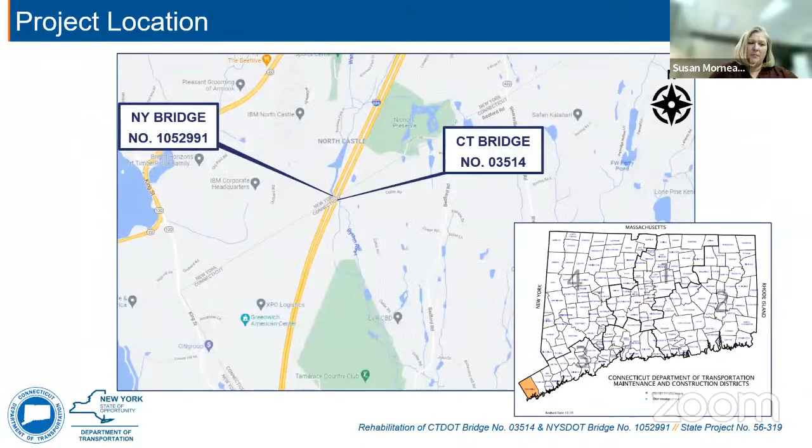Thank you, Susan. As Susan said, my name is Quinn Duffy. I'm a project engineer with BL Companies, and I am assisting the Connecticut Department of Transportation administer this project.

You can see the project location here with leaders pointing to the Connecticut Bridge, which is 03514, and the New York Bridge, which is 1052991. We typically refer to these types of structures as sister bridges because they carry the same route over the same river. You can see that this project is located on the northern end of the Connecticut Panhandle.

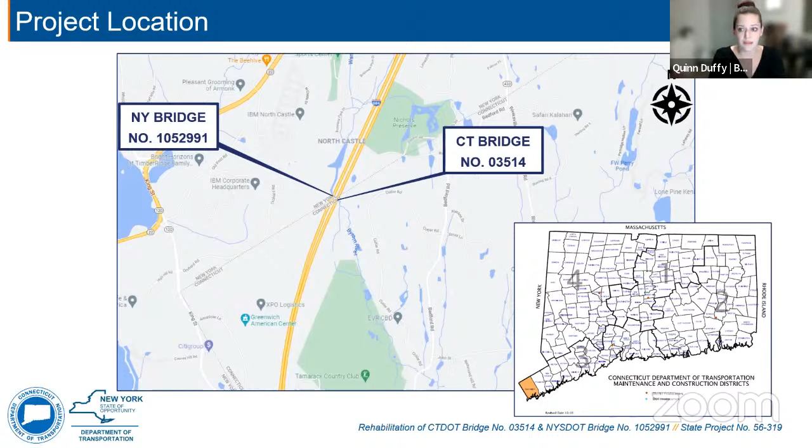The project is located in District 3 in Connecticut and District 8 in New York.

Here we have a little bit more of a zoomed in aerial location of the project. You can see the white dashed state line that passes right between the sister bridges, which are outlined in red. The Byram River is shown in blue, Cutler Road to the east in Greenwich, Connecticut, and the edge of the IBM campus to the west in North Castle, New York.

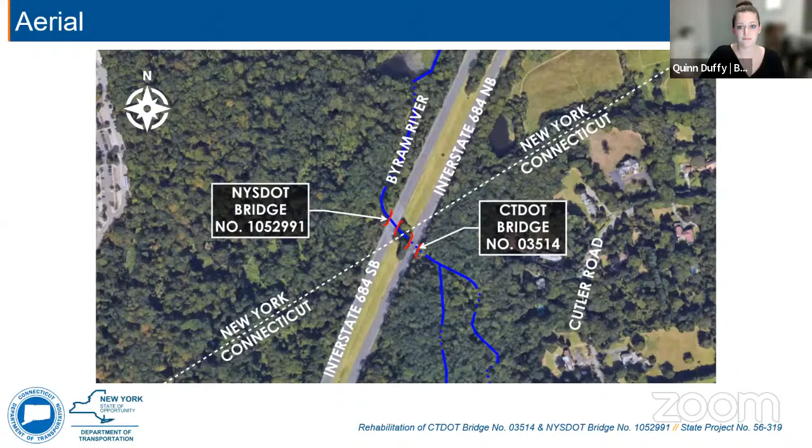We will be referring to a couple of elements in a bridge structure that may not be familiar to you throughout the presentation, so I'd like to take a moment to introduce them. The substructure, shown here in red, is the component that supports all other elements in a bridge. The substructure can include abutments and piers, and it does include parts of the structure that are underground.

The substructure supports the superstructure, which is shown here in blue. Superstructures can consist of beams or girders, or in the case of the structures we will be discussing tonight, box beams. These beams support a deck, which is shown in light green, which is the component you drive on.

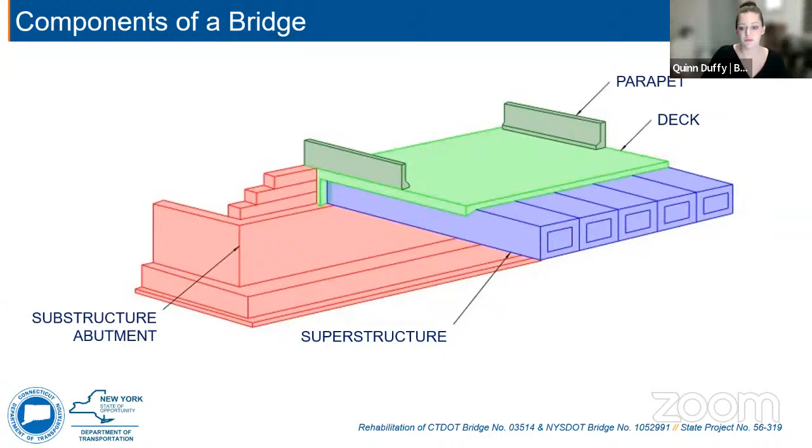Decks typically have a wearing surface or pavement on them as a cover. The last component I want to point out are the parapets, which are shown in a darker green color. These can be anything from metal railings to solid concrete and protect drivers on the structure.

These bridges are comprised of single span structures consisting of pre-stressed concrete box beams that are supported by reinforced concrete abutments. The combined average daily traffic on both the Connecticut and New York bridges is just under 71,000 vehicles per day, and that is based on the 2019 Connecticut Department of Transportation traffic log.

All right, here you can see the existing typical section of the Connecticut Bridge. It's as if you had sliced it like a piece of cake. You can see the precast, pre-stressed box beam superstructure that supports 3 12-foot travel lanes, a 6-foot left shoulder, and a 10-foot right shoulder with an open steel bridge railing.

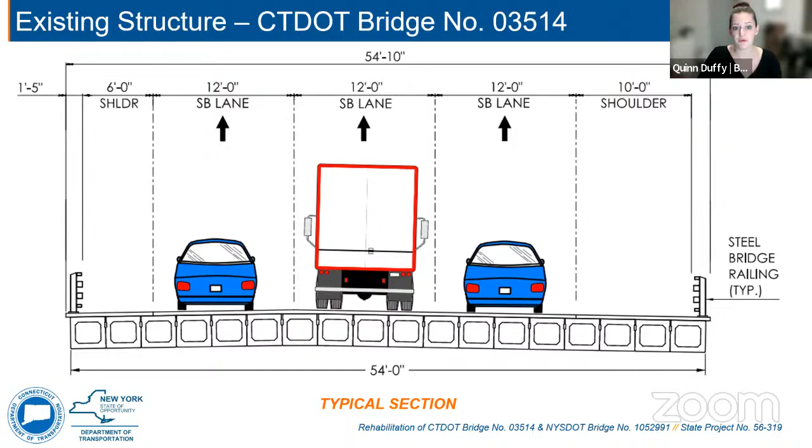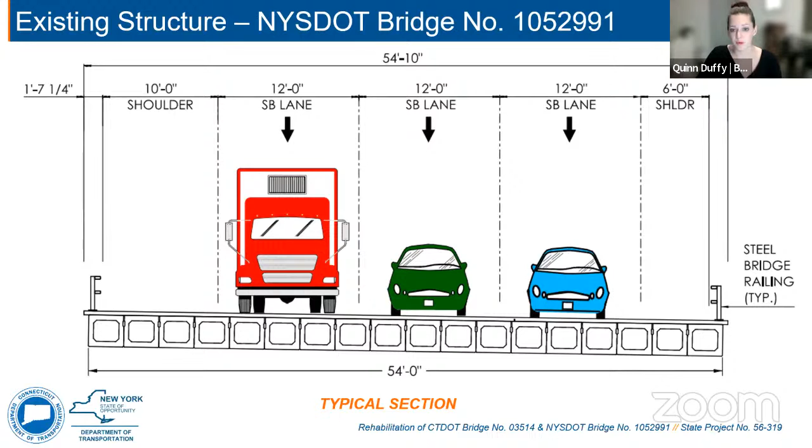Very similar to the Connecticut Bridge, the New York Bridge also supports 3 12-foot travel lanes, a 10-foot left shoulder, and a 6-foot right shoulder. The main difference between these two structures is the cross slope. You can see on the New York Bridge, there is no high point or crown like there was on the Connecticut Bridge.

Here we have a couple of bridge approach photos. On the left, you can see the Connecticut Bridge, which carries I-684 southbound. This is a picture that's taken looking north. Similar, on the right, we have the New York Bridge, which carries I-684 southbound, and that is looking north as well.

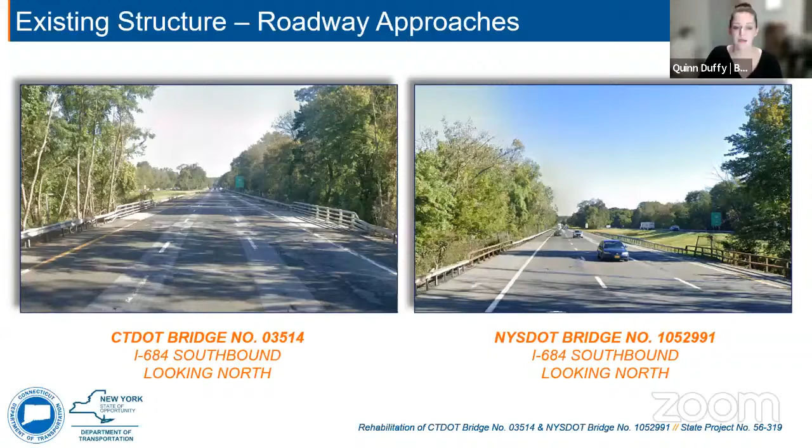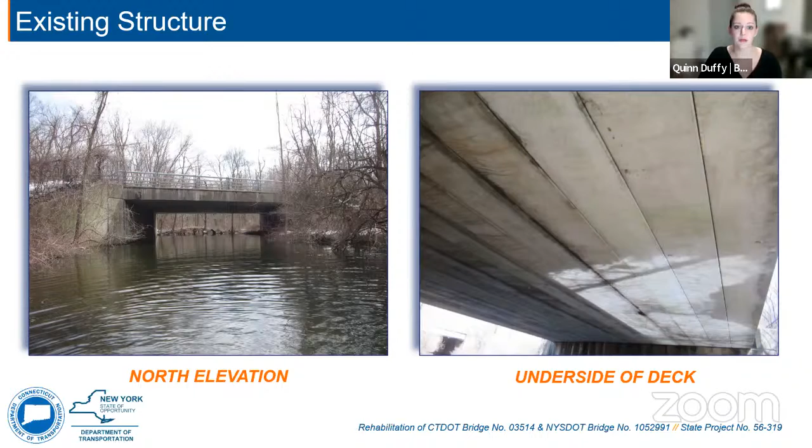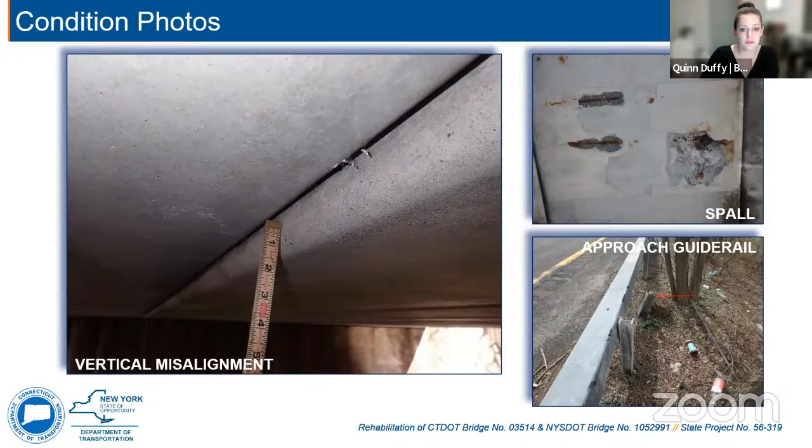So for the purpose and need of the structure, I'm going to focus on the Connecticut Bridge, because that was really the driving force behind this project. The purpose of the project is to address the safety concerns and structural deteriorations of the existing structure. The overall condition of the Connecticut Bridge is poor. As seen in the photos on the previous slides, the pre-stressed box beams show minor spalling with exposed rebar.

The post-tensioning strands have deteriorated or failed, which causes the box beams to act independently of each other. That makes the beams look like piano keys being played at different times as cars and trucks travel over the structure. That piano keying has caused severe deterioration to the bridge deck and wearing surface.

The metal bridge rail has deterioration on both structures. However, as you can see, the bridge rail has been replaced on the Connecticut Bridge, leaving it in moderately better condition than that of the New York Bridge.

There are a couple photos on this slide as well that show some of the deteriorations. The photo on the left is the existing bridge rail on the Connecticut structure, which has been replaced since the bridges were constructed originally. The photo on the right gives you an idea of what the deck condition looks like, specifically at a joint. You can see areas of pavement patching are missing, and missing joint material as well. This creates an uncomfortable experience for the traveling public or the driver.

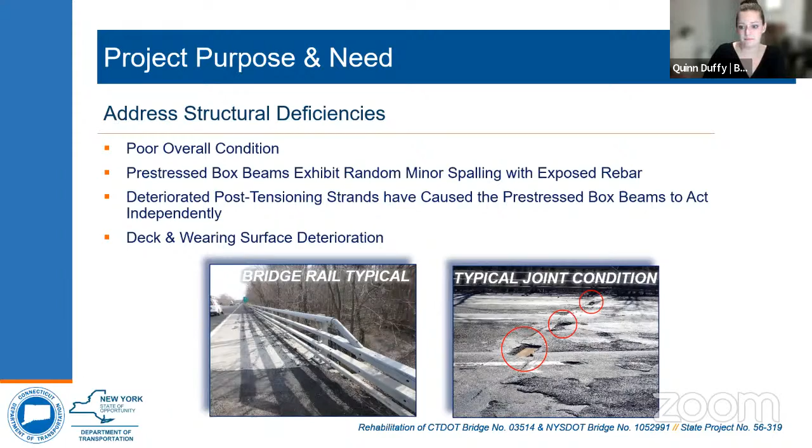All right, thank you, Quinn. So we went through a pretty extensive alternatives analysis to determine the best approach to rehabilitate these structures.

We're going to be using modern construction details and modern components so that we can extend the service life of those abutments and really get the biggest bang for our buck when we rehabilitate this structure.

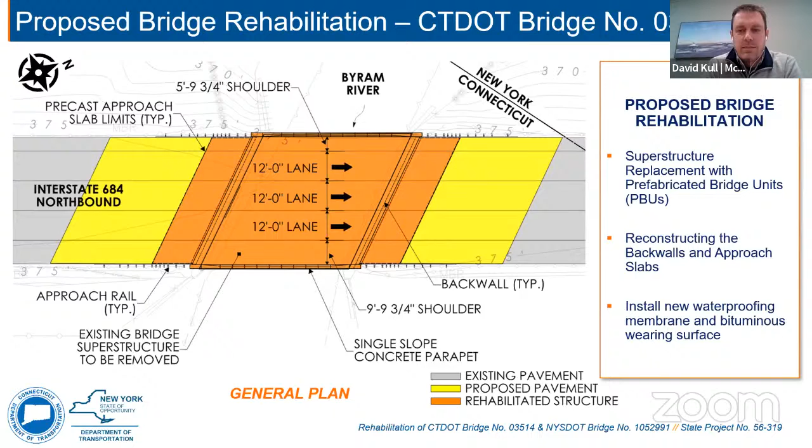So this is a general view of the Connecticut Bridge and the work that's going to be performed. If we move on to the next slide, you'll see that it's pretty similar also for the New York Bridge. We're going to be doing the same thing.

Superstructure replacement, approach slab, and approach roadway work. Taking another slice of that pie, this is what our proposed structure is going to look like.

We're going to be keeping the same lane configuration, 3 lanes in each direction. We will be putting a modern bridge barrier that meets current design criteria on the bridge. So one of the things we have to do, because we're keeping the existing abutments, is shorten our shoulders by a couple inches on either side. We're going to be putting a modern concrete barrier on top of the bridge, and because of that, we're going to have to go from a 6-foot shoulder down to basically 5'9" 3/4 for the Connecticut Bridge.

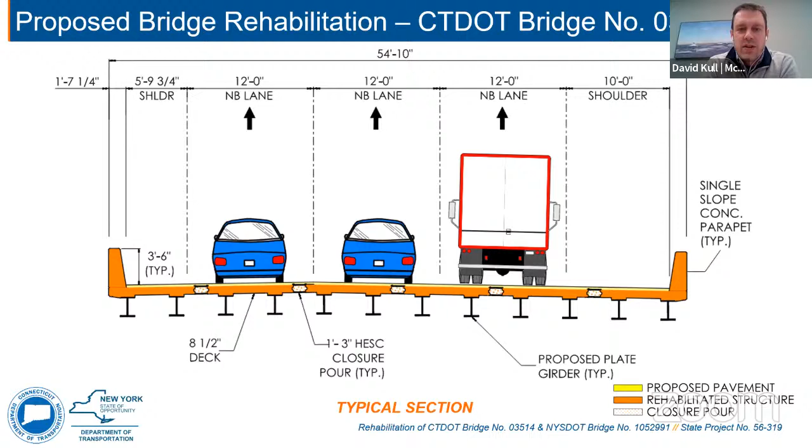And we move over to the New York Bridge, you'll see that it's pretty similar. I'll talk about those closure pours in a second on the next slide. Same thing here, you can see the shoulders have just been reduced a little bit.

So one of the things we were taking a look at is how are we going to build this bridge, and how can we minimize impacts to the greatest extent possible? The method we chose to move forward with is called accelerated bridge construction, or ABC, which minimizes the closure duration to the greatest extent possible.

The way we're going to go about doing that is we're actually going to build most of the superstructure in advance, prior to when we have to get out there and shut down the bridge and divert traffic, which Gina will be talking about in a second. One of the interesting and fun aspects of this is when we actually get out there to close the bridge to traffic, most of the bridge will have already been built. It's just a matter of us or the contractor taking it and dropping it into place and then connecting it like a bunch of Lego sets.

So what we're going to be using for this superstructure is what are called prefabricated bridge units, or PBUs. This is a technique for accelerated bridge construction, very common, done successfully all throughout the country, where we basically take 2 beams and pour the modern concrete deck on top of them, and ship those pieces out and put them into place.

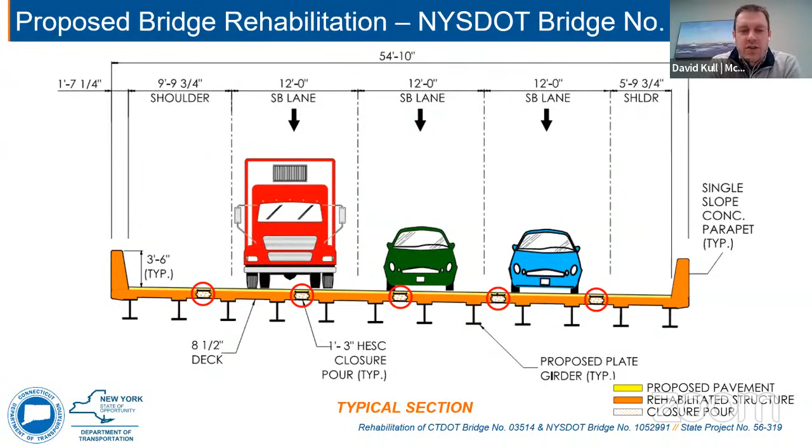If we move to the next slide, we can show some actual real life PBUs of what's going to happen. Here's a picture of a PBU on a successfully completed project. It's a little hard to see, but there's 2 beams with the concrete deck, and some of the reinforcing sticking out there are those hoops, used to connect to the next PBU, which we show in the next slide.

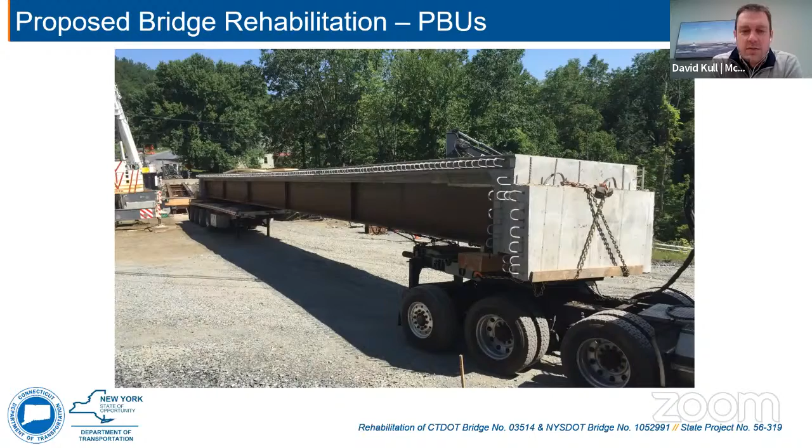They're spaced about a foot apart, and we fill it with concrete. Then we come back, let it cure, put a membrane, pave over top of it, and we're good to go. So that's a basic summary of the structural component of this.

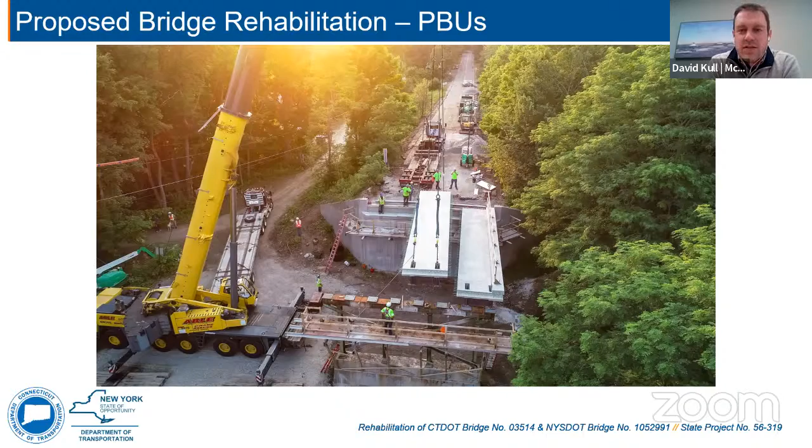But one of the big factors with ABC construction is how do we maintain traffic during closure, because we need to give the contractor access. Here to talk about that is a project manager for McFarland Johnson, who's leading the project and specifically the traffic control of this, Gene McCarthy. I want to turn it over to him. Great, thanks very much, Dave.

As Dave stated, in order to complete the bridge rehabilitation, we need to close the bridges. And since Interstate 684 is such an important regional traffic corridor, traffic must be maintained during this construction, using accelerated bridge construction to accomplish this.

Each of these bridges will require 2 weekend bridge closures. These closures will begin on a Friday night after commute hours and end early Monday morning before the commute begins. The total closure for each weekend is 55 hours, and there will be a total of 4 of these weekend closures.

So in order to close the bridges and maintain traffic in both northbound and southbound directions on I-684, temporary crossovers will be constructed in the median, allowing 2 lanes of traffic in each direction to remain open during construction. These crossovers will actually be constructed early in the process, so they'll be ready to go when we need to close the roads for construction.

As shown in this slide, the southbound bridge in New York will be the first to be rehabilitated. The existing 3 lanes of traffic in each direction will first be reduced to 2 lanes approaching the project area. During this period, southbound traffic will use the temporary crossover shown here to cross the median and use the northbound bridge in Connecticut to cross the Byram River. Once over the river, traffic will use the next crossover to return to the existing southbound lanes. This allows the contractor complete access to the bridge under construction, which is shown here in red.

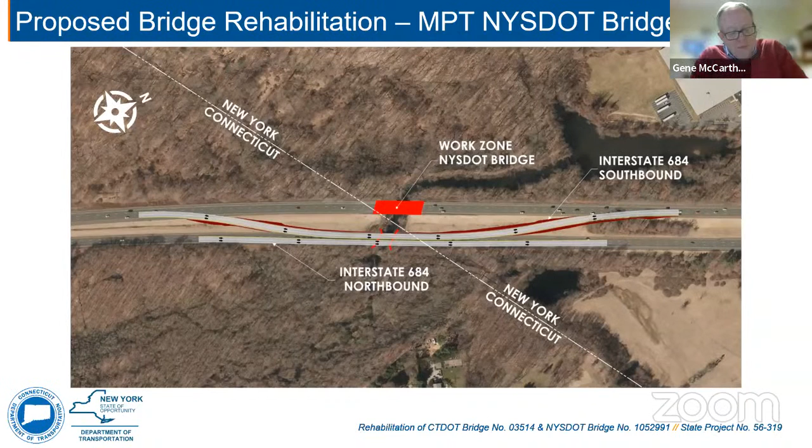The next slide depicts how the 4 lanes of traffic, 2 in each direction, will be accommodated on these bridges. A temporary barrier will separate the opposing directions of traffic.

Once the 2 weekend closures to rehabilitate the New York bridges are complete, the crossover will be reconstructed to accommodate the closure of the Connecticut bridge, which is shown on this next slide.

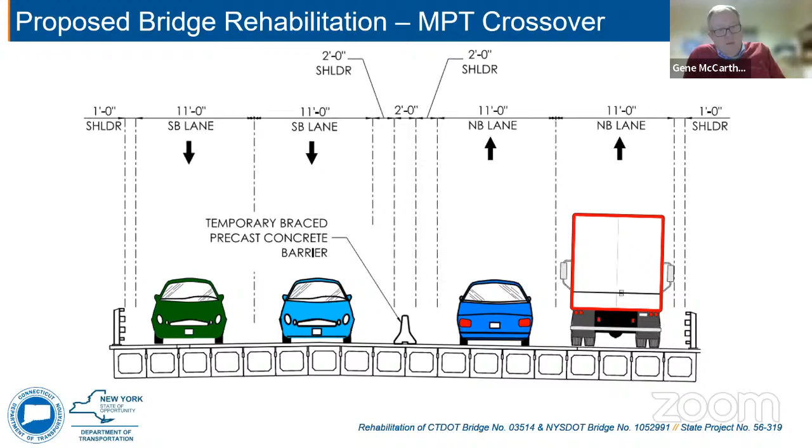Here you can see the crossover configuration for the construction of the northbound bridge in Connecticut. Basically, it's the same as the prior situation, but the northbound traffic will use the temporary crossover to cross the median and use the newly rehabilitated southbound bridge in New York to cross the Byram River.

Once the 2 weekend closures to rehabilitate the Connecticut bridge are done, all the crossovers will be removed and the median will be restored to its original condition. And I will now turn it over to Quinn Duffy.

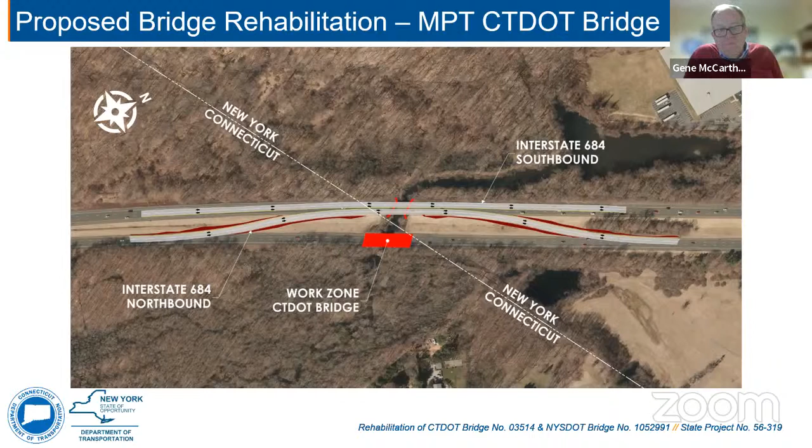All right, thank you, Gene. So to perform this construction, we do need permits from both Connecticut and New York. For Connecticut, we need the Connecticut Department of Energy and Environmental Protection, or CTDEEP, Stormwater Discharge Permit, and the CTDOT Flood Management General Certification, or FMGC, which is a CTDOT permit administered by the Connecticut Department of Transportation.

For New York, we will need the New York State Department of Environmental Conservation general permit for stormwater discharge from construction activities. We will also need the New York State Form Perm 33, which is essentially a highway work permit similar to an encroachment permit. We do not anticipate any right-of-way issues since our project limits are within the state-owned right-of-way in that median area between the 2 highways. We also do not have any anticipated utility impacts associated with this project.

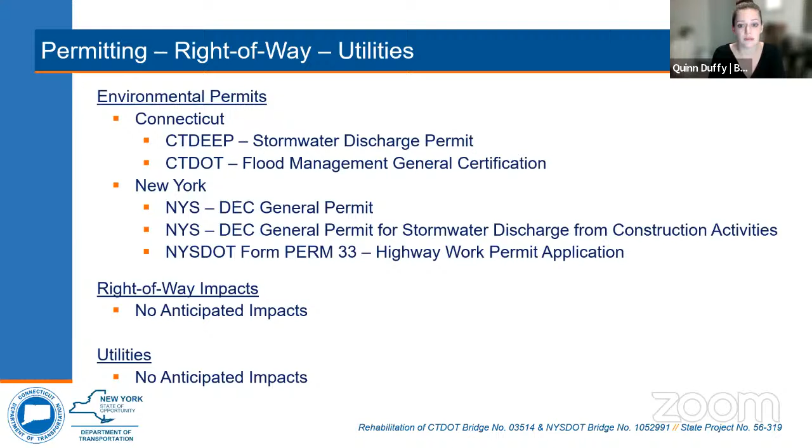All right, before I wrap it up and get to the question and answer portion of tonight's presentation, I'd just like to run through the project cost and schedule. Each structure has an estimated cost of $9 million, making the total estimated construction cost for the project $18 million.

This project will be paid for using state and federal funding. Because this project is on an interstate, the federal government will cover 90% of the cost of construction, and both Connecticut and New York will cover the remaining 10%.

We expect that construction will begin in the spring of 2024. In the spring, around April, when construction begins, it'll be focused on construction of the crossovers. It will not impact mainline traffic until the actual bridge closures, which we expect to happen in July and August. Please note that the schedule is preliminary and predicated on the availability of funding.

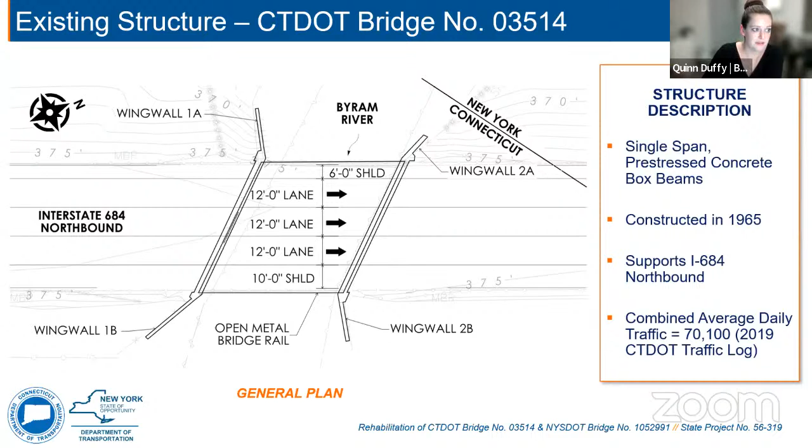Thanks, Jennifer. I just pulled up the general plan we showed earlier in the presentation, and both structures were constructed in 1965. You can see the Connecticut structure here and the New York structure here. These structures were actually constructed by New York State DOT, which then transferred ownership of the Connecticut bridge to Connecticut. So it's kind of funny that we now have one structure in Connecticut and one in New York, but they were both actually constructed by New York State DOT in 1965.

Thank you again. All right, let's see.

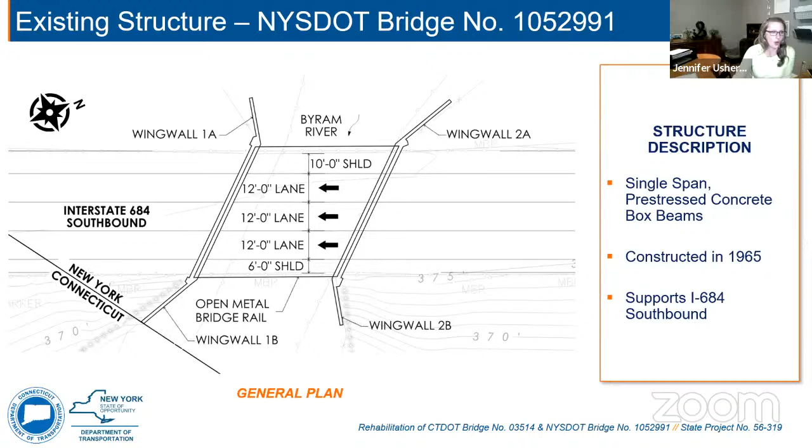Another question just came in, asking what happens if the bridge is not ready to drive on come Monday morning. I'm going to transfer that over to Dave Kull with McFarland Johnson to answer.

Sure, thanks. Gene and I will probably tag team this question. We're structuring this project with what we call incentives and disincentives - a carrot and stick approach. If the contractor can get the bridge open and everything prescribed in each weekend closure performed within that 55-hour window, they'll get a monetary incentive. The flip side is if they don't get the bridge open by Monday morning, there's an hourly disincentive charged every hour the bridge is not open. So if the contractor doesn't have it open come Monday morning, they're going to keep working until they get it open.

But we've gone through some pretty extensive research. We've scrutinized a lot of the details, a lot of the plans, and we're pretty confident that we're going to be able to open this bridge in the time span that we prescribed.

I'm not sure if you wanted to add anything, Gene. I think the only thing I'd add is that, as Dave said, they are going to pre-assemble a lot of these components. So the contractor will have a very good idea about how all the pieces go together prior to those closures - a kind of dry run with all the pieces together before they put it in place. So we've done a lot of homework and pre-planning to ensure they can make it happen during the time we've given them.